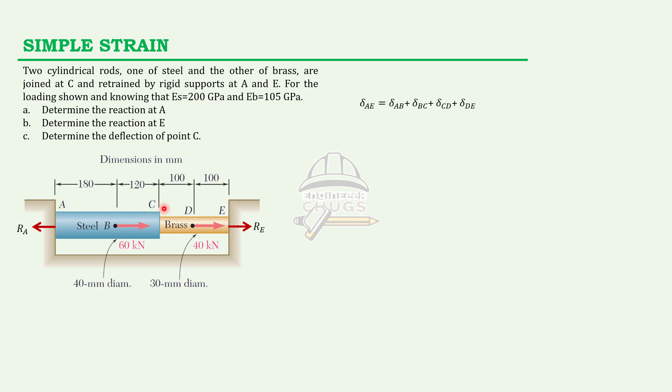Okay? That is equal to the deformation at A to B, B to C, and then C to D, and then D to E. That is our deformation from A to E. Okay? So, ilagay natin dito yung ating deformation from AB. Yung BC naman natin is ito. CD ito. Yung DE is ito.